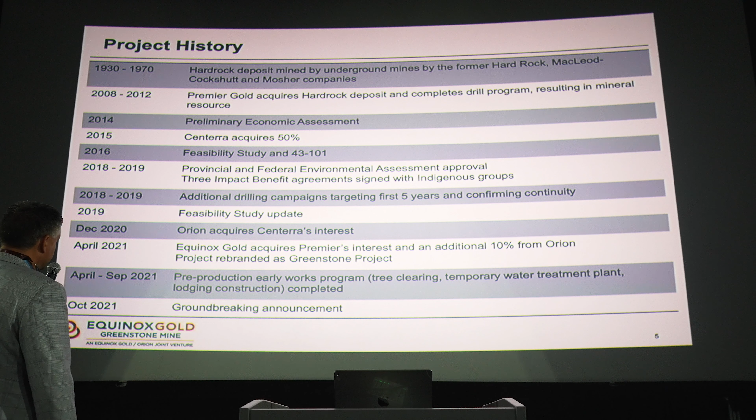Here's a brief history of this project. It's a brownfield project, mined underground between 1930 and 1970 through 4 different shafts. In 2008, Premier Gold reactivated this area with some drilling. In 2013-14, we started economic studies for this deposit, and we progressed the Greenstone Gold Mine team to develop this property up to 2016 for a feasibility study.

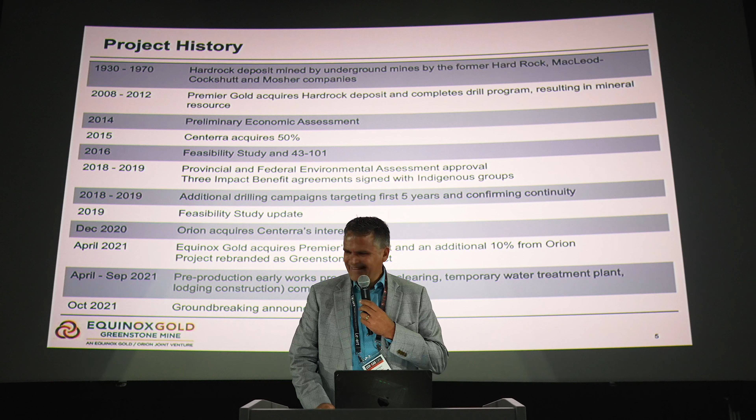In 2016, after the feasibility study, we started different de-risking projects for the environmental assessment. We started to develop partnerships and agreements with the First Nations and the Métis Ontario, and then moved forward with detailed engineering for the project.

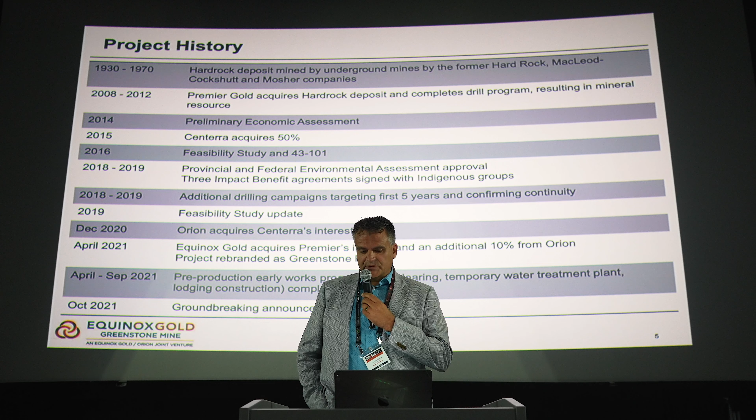An acquisition happened with Orion to replace Centerra Gold, and Equinox came in, bringing us to where we are currently, 60% owned by Equinox Gold and 40% owned by Orion. The project remains the same, Greenstone Gold Mine, to develop, construct and operate the mine. We have the same team since 2013 at the beginning.

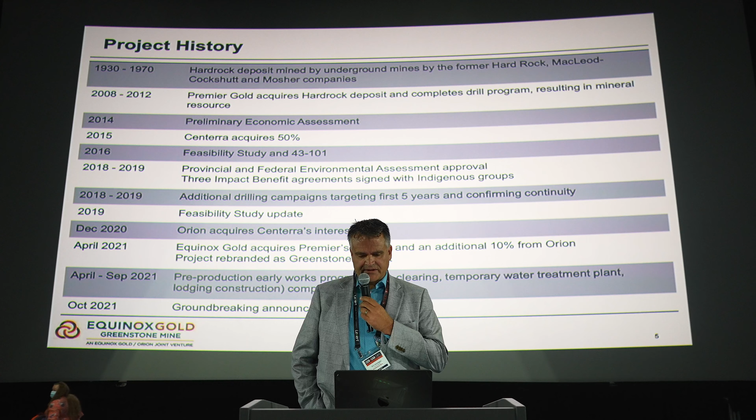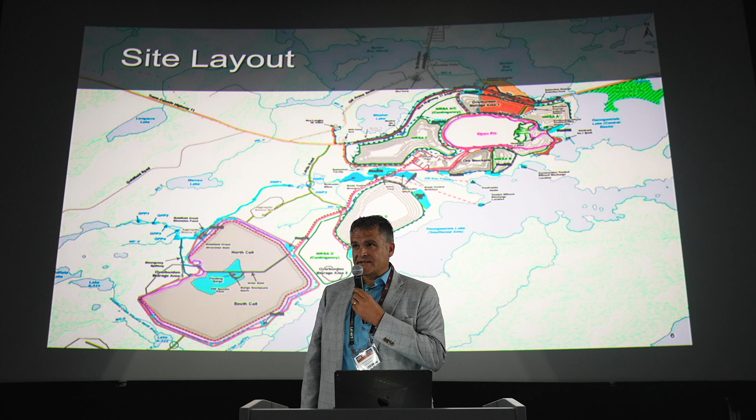We also need to rebuild the MTO patrol yard station, since it was in the footprint, and acquire 65 houses that were in the footprint of pit 2. We'll need to eventually remove the Hydro One substation, and demolish completely the head frame at the entrance of the town of Geraldton. All of this is currently underway.

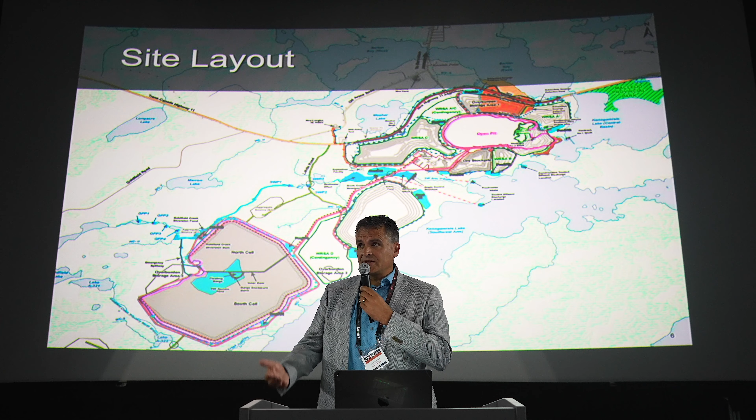We could do a whole other presentation on that, but today we'll concentrate on the mine site. Just looking at this footprint, it's 12 kilometers by 5 kilometers. If you come to Greenstone, you'll see it's large, and all along the highway there's construction everywhere.

This project is very important for the Greenstone area. We're talking about a very small town, and for the people who live there, over 2,000 jobs are coming, along with a lot of return via tax and upgrades to different infrastructure. A partnership with all the Indigenous groups and the Municipality of Greenstone has already happened.

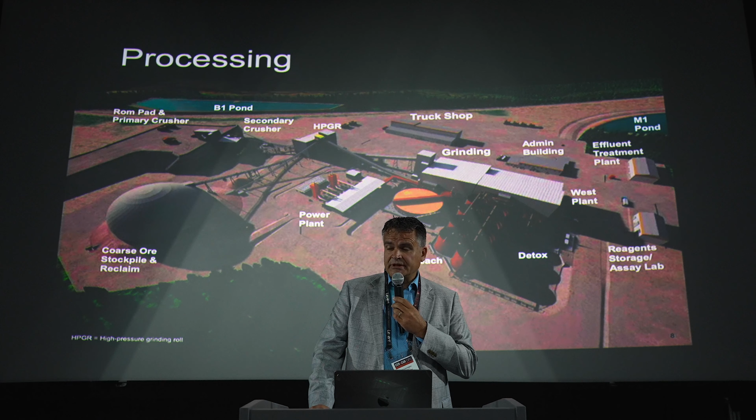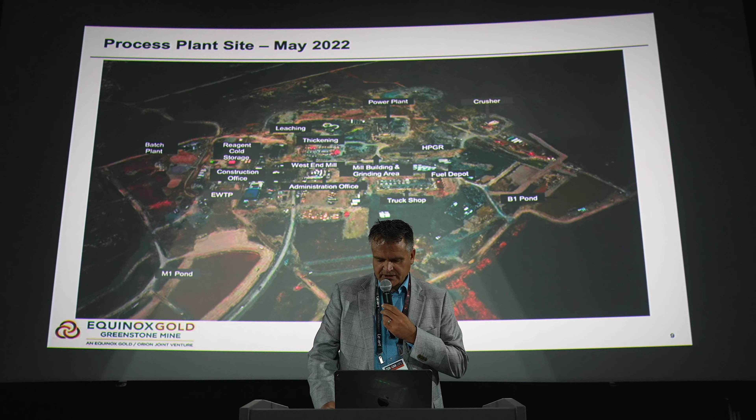We have 750 people on site currently, working all days at full capacity at the peak of construction. The big building on the east side is the truck shop under construction, and all the other buildings you see with steel erection currently are the crusher, the secondary crusher, the HPGR building, and the reclaim tunnel that will go to the dome and eventually to the process.

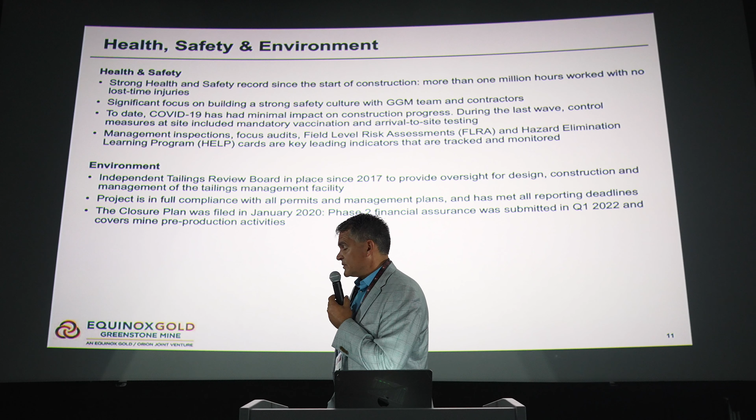For the project itself, regarding health and safety, since the beginning we've had no lost time injury. We just finalized a call this morning confirming we've reached 1.5 million hours without lost time injury, and it's really important for us at Greenstone to make sure all our employees and contractors return home safe.

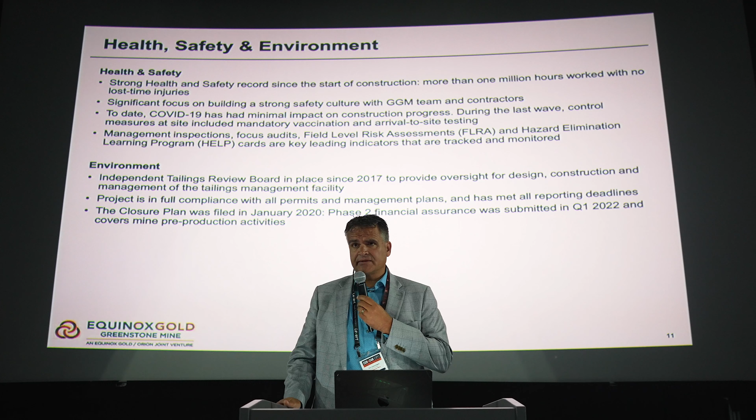For COVID-19, we haven't been too impacted by that to date. At the beginning last year, we implemented mandatory vaccination for all employees and contractors. Currently we've released a lot of measures because the severity is less, but we monitor very closely what's happening.

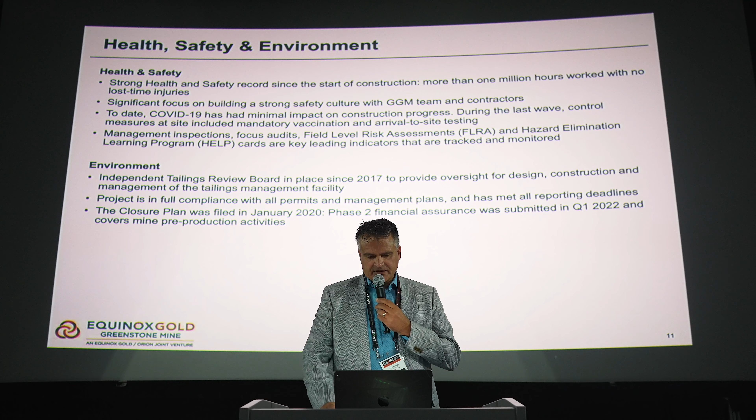For the environment, we have all permits to build and operate the mine, and we also work with the Tailings Review Board for the tailings facilities. This is what we built last winter, because for the tailings we needed to relocate a creek to pass through the tailings area. This was done during the last winter and is all complete now, done with GPS measures for fish habitat, all according to the geomorphology for the future creek.

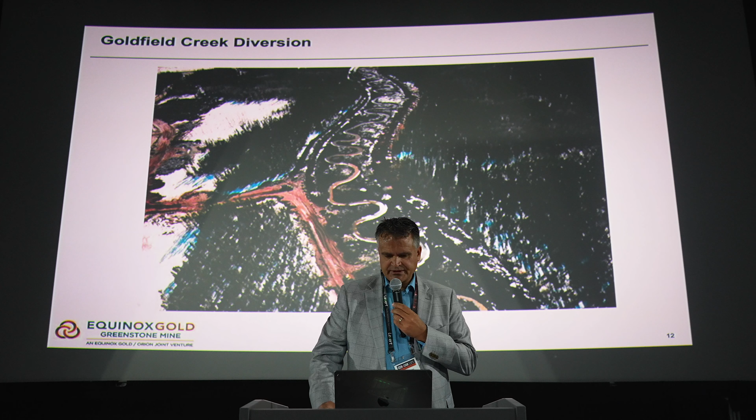For the Indigenous partnership, as I said, with 4 First Nation groups and 1 Métis group, we finalized all agreements in 2018 and 2019.

Currently, all our community are very implicated with us. We develop top of the agreement other business. We have a lot of ideas with them, and us to be partners. We work currently on the relocation of the police station with them too. We work on a solar panel project, 10 megawatts, with them too. And there's a lot of other things in the future too we'll work with them on.

Plus, for sure, we started training. They are currently 15% of the construction manpower, and we work with training to increase this number, with a permanent job in the future.

For the mine itself, we just started mining. First blast happened a few weeks ago, first load was yesterday. Last weekend there was a barbecue in Greenstone. We invited the community, had very good attendance for this event, and organized a site visit for all the people, the citizens. Attendance was up to 500 people. It was a very good day.

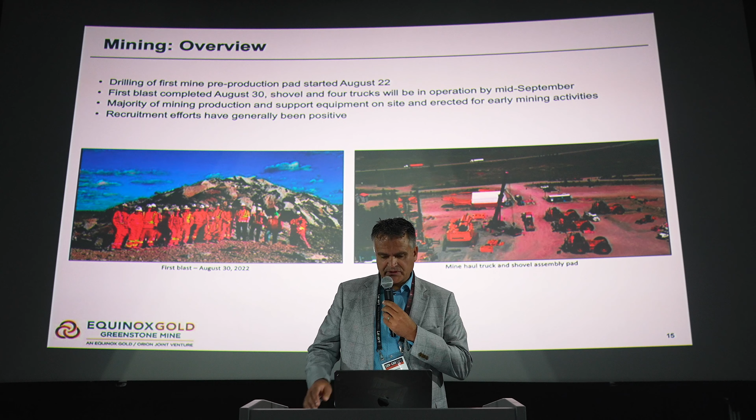Some pictures of what's happened in the last few weeks on site, where we assembled the different machinery, the shovel, the trucks. All is in function, as I said, and this is a picture of the first blast with the team on site.

For the pit itself, the open pit is close to 2 kilometers long by 1 kilometer wide, for a depth of 600 meters. The reserve itself is 135 million tons at 1.27 gram per ton, giving a reserve currently of 5.5 million ounces.

We also have a nice future underground opportunity. It's 4 million ounces already defined there, which will eventually be able to extend the life of the mine.

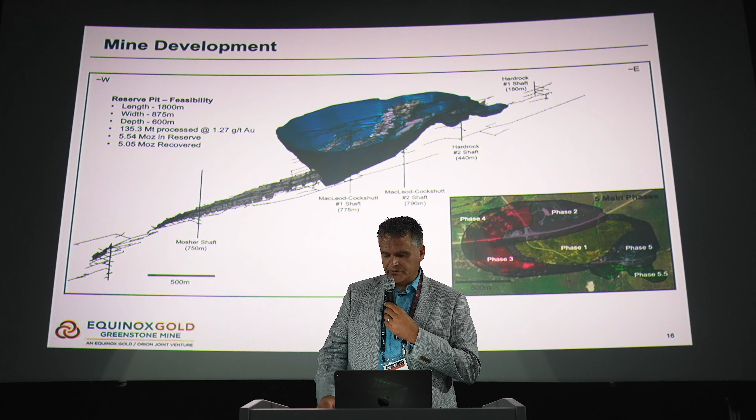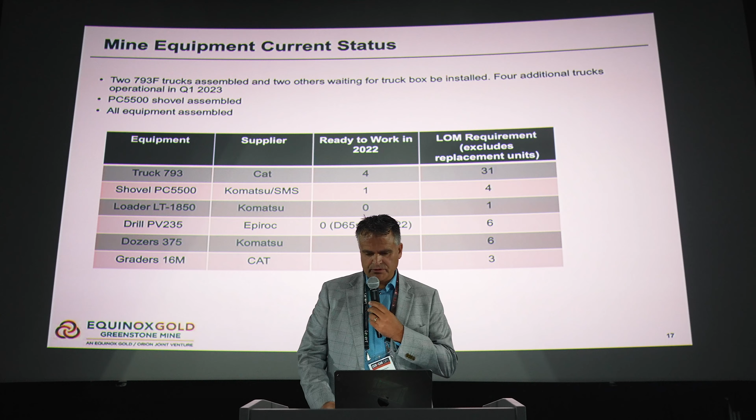For the machinery, as I said, we just assembled a first fleet to make sure we're able to supply the rock for construction, but eventually we'll have up to 31 trucks and a few shovels to supply a 50,000 tons per day operation.

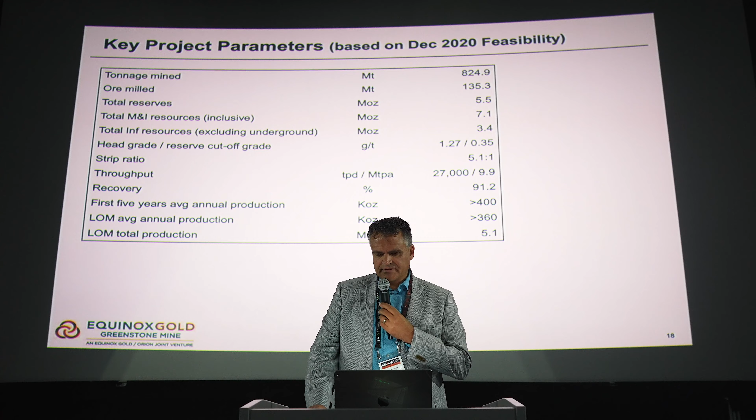This is an example of the tonnage we'll mine during the life of mine. We talk about 825 million tons, and for the mill, 135 million tons. Some other numbers are presented here.

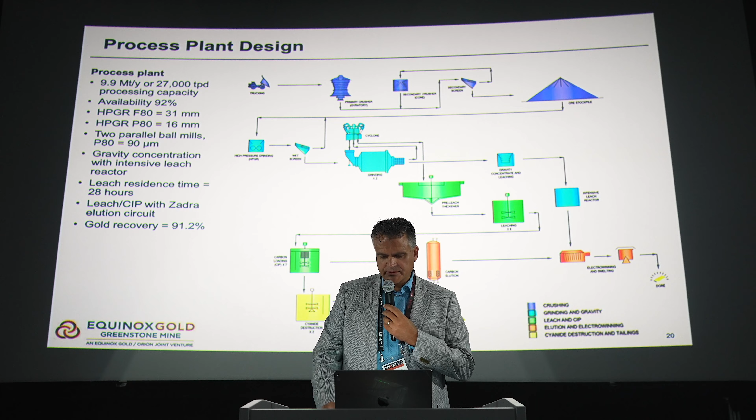We talk about the process, as I said, 27,000 tons per day target, or close to 10 million tons per year. Currently we are at 30% progress for the construction, and we target to enclose all of this building by the end of the year.

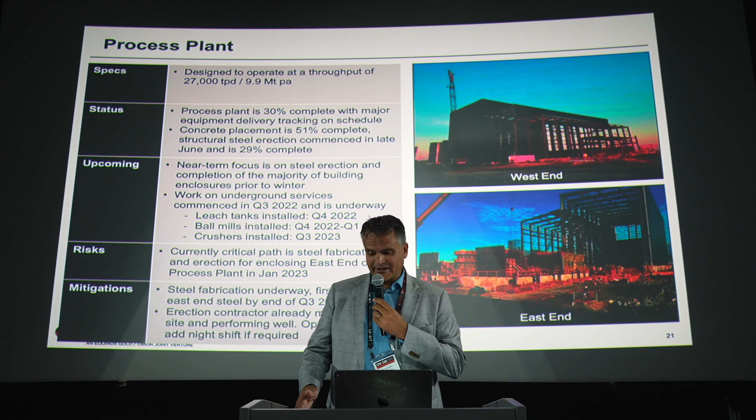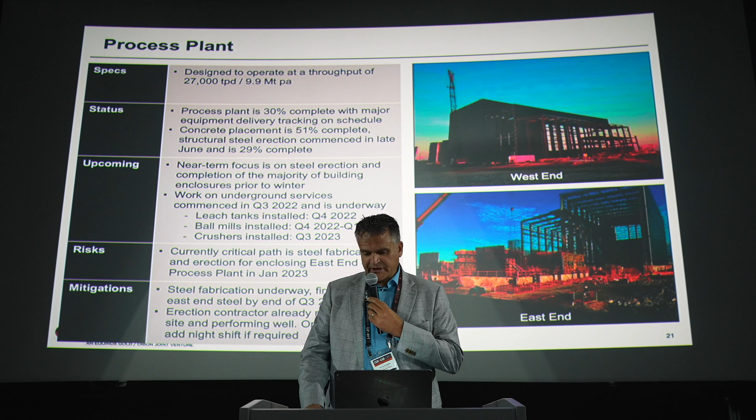The risk for sure is the supply chain. It's very high risk currently on the market. We have some delay with the steel, but we have a guarantee it will arrive in the next 2 weeks. During this time, we switched our schedule to finalize the foundation for the second ball mill, and in beginning October we'll start the erection of the second portion of the process to make sure it's covered before winter.

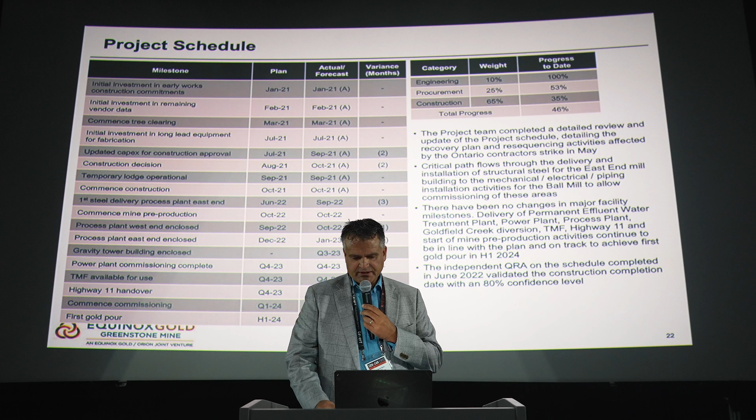Our project schedule milestones, where we look, where we are currently, as I said, the east end to enclose. After that, the gravity tower by Q3 '23. The power plant on the same timing. The tailings facilities for Q4 '23. Able to turn the highway functional in Q4 '23. And to start the first pour of gold in the first half of '24.

For employment and opportunity at Greenstone, I will say, since the beginning in 2013, Greenstone has had close to zero turnover. Nobody left the company; we have a very good team that worked together since the beginning. The team essentially was the core of the team. It's fun because mining is a very small world. Just the presentation before for Agnico was us - we built 2 mines for Agnico Eagle just before joining Greenstone, and were former employees of Agnico before. It's a small world. Finally, we decided to start Greenstone, and now we are where we are.

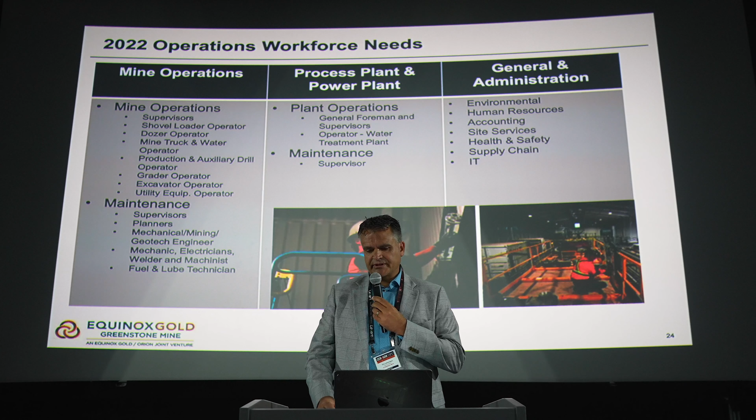For the employment opportunity, there's a lot of jobs we need to fill. We started with some positions in mining, but in the future there will be other important hiring we need to do to fill all the positions. We talk about 550 people permanent, plus all the contractors around, for manpower around 750 to 800 people.